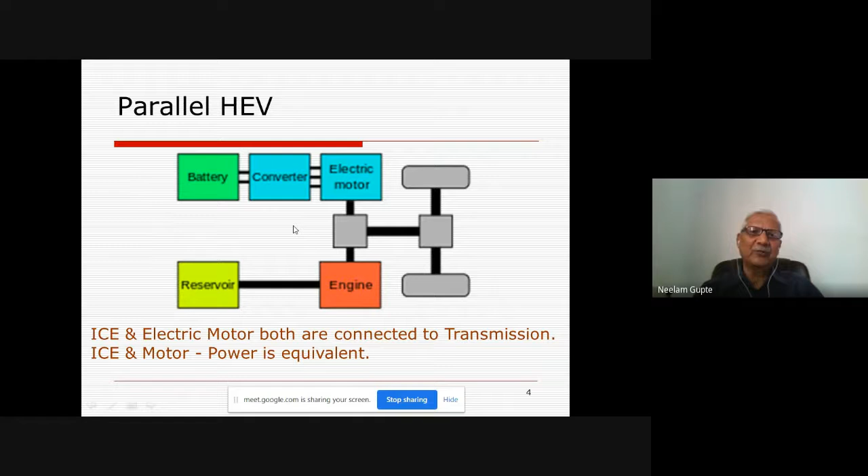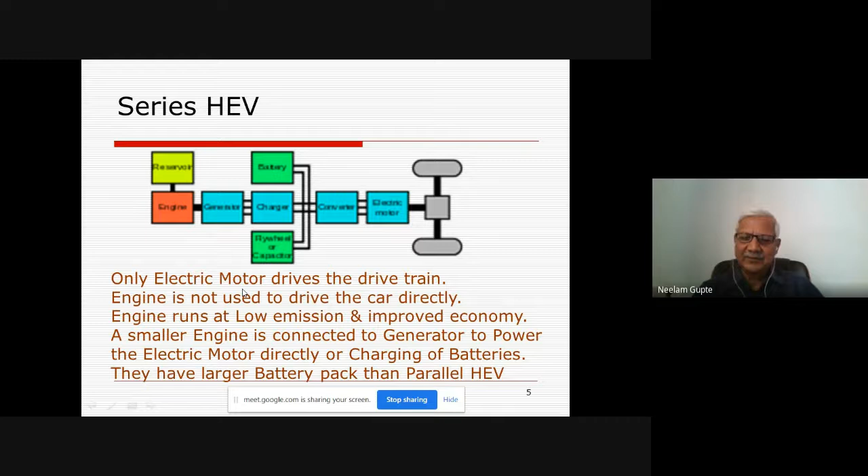Next is the series hybrid electric vehicle. Here only the electric motor drives the drivetrain; the engine is not used to drive the car directly. The engine runs at low emission and improved economy. Generally, a smaller engine is connected to a generator to power the electric motor directly, or to charge the battery, and the battery then drives the motor. Generally, here the battery pack is larger than in the parallel hybrid electric vehicle.

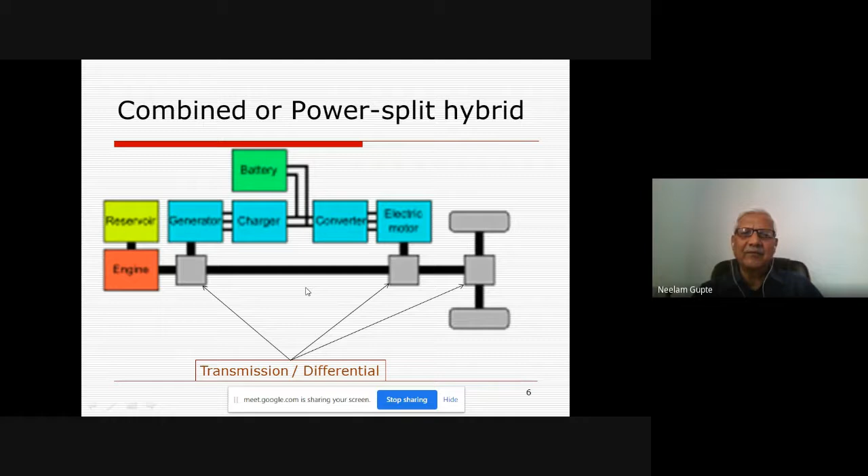Then there is the combined or power split hybrid, where the engine and motor, in various combinations, can drive the vehicle individually, together, or separately, with various parameters acting together.

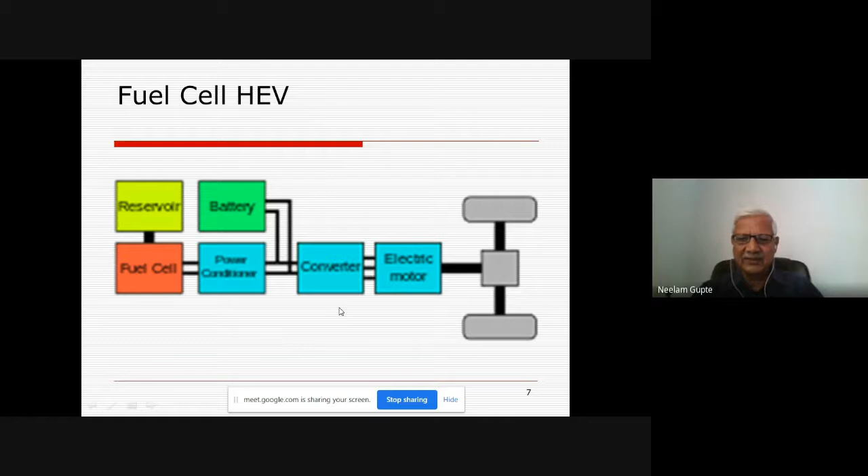Then there is the fuel cell hybrid electric vehicle. The fuel cell generates power, drives the vehicle, and also charges the battery, and the charged battery then drives the vehicle accordingly. This kind of fuel cell hybrid electric vehicle has also started, but is not yet popular enough.

Another category is the plug-in hybrid electric vehicle. When I was working on my project, our donor, Mr. Ashok Patel, asked me that the vehicle would need to go to a gas station for filling diesel, since any hybrid electric vehicle working on diesel-electric or petrol-electric will have to go to the gasoline station. But there may be some operators or users who would just not want to go to the gas station. That's how I came to know about the plug-in hybrid.

I'm talking about way back in 2012. At that time, HEVs were hardly even talked about.

Then there is the HEV with onboard charging. In my project, we later on tried to do that onboard charging, and we partly succeeded, but there is still a lot of work to be done. There can be solar operated, fuel cell operated, or IC engine operated onboard charging possible for all types of hybrid electric vehicles.

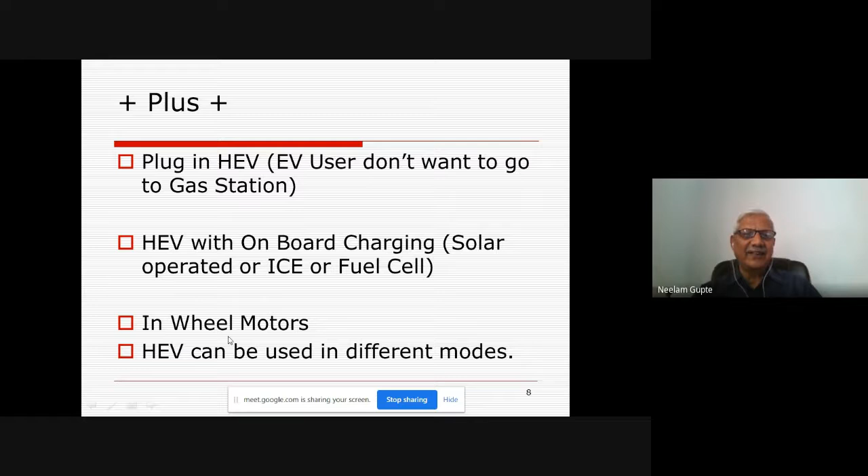And then there is another category of hybrid electric vehicles which use in-wheel motors, also called hub motors. So, as I said, all HEVs can be used in different modes.

Initially, some eyewash was being done by manufacturers with what they called the micro hybrid — I do not know why they called it hybrid — but the system available on those vehicles was start-stop. Whenever the vehicle is halted in traffic or at a signal for a certain amount of time, the engine will be shut off; that is what was called micro hybrid. It will start again once you press the accelerator or clutch.

Another type, they called mild hybrid. It was again with a start-stop system as well as regenerative braking, which they call electric boost.

Next was full hybrid, where the start-stop system was there, regenerative braking was there, and the charge depleting mode was also there — whenever the charge is depleted, the vehicle will turn on conventional fuel. And the last one is plug-in hybrid, which has start-stop, regenerative braking, charge depleting mode, and a rechargeable battery also.

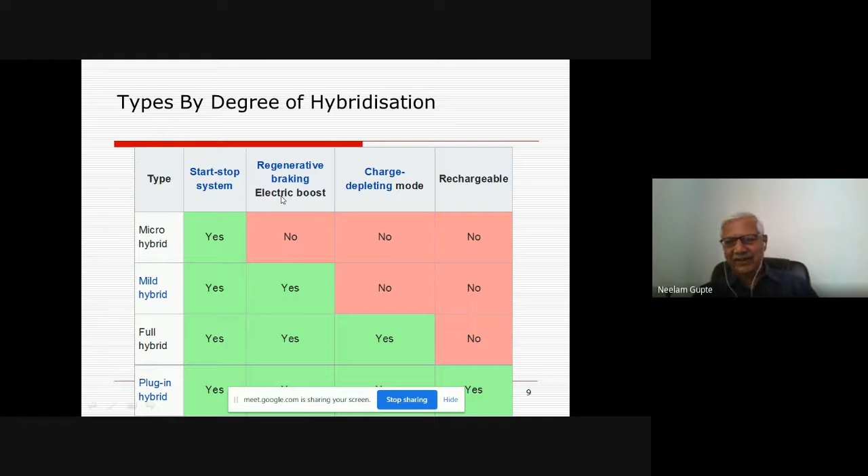So with this, let me begin with my project, which was on reduction in consumption of fuel in an existing diesel car.

The preamble on which I started working was the several causes for growing concerns in those days. This project was started in 2008, and the preamble was depleting fossil fuel. There was much hue and cry about fuel resources going to be exhausted by 2060, and that is how this depleting fossil fuel concern for everyone started.

Another concern was the dependency of the country's economy because of import of crude oil and the global pricing of crude oil. At that time, and even today, OPEC countries control the prices of crude oil, whereby the prices of oil, diesel and petrol keep jumping up and down. This is particularly called national oil security, and that is also one of the concerns.

International concern for the environment had begun in those days due to the impact of global warming and greenhouse gas emissions.

Limited number of cost-effective research was done then in the direction of efficiency enhancement and controlled combustion parameters. Because those days Euro 2, Euro 3 was going on, I expected that something should be done or some research is necessary to convert existing vehicles into hybrid electric vehicles. Alternate energy sources also have dependency either on oil wells or on renewable sources, but the rise in volume year on year of sales adds to the gravity of the problem further.

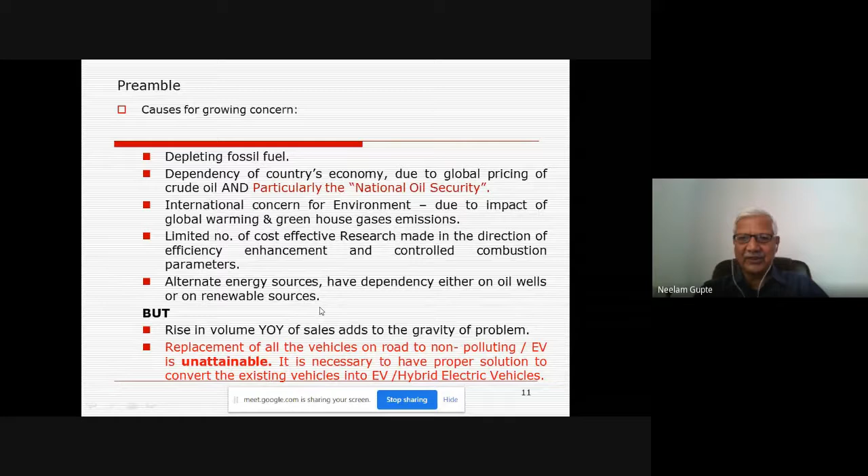The important point is that replacement of all the vehicles on road with non-polluting electric vehicles is just not attainable. Hence it is necessary to have a proper solution to convert existing vehicles into EV or hybrid electric vehicles.

There are advantages and disadvantages associated with EV, HEV, but soon the necessary infrastructure will be developed by the government so that the disadvantages associated with EV, HEV will be nullified. Also, there is a need for development of innovative process and efficient methodology for conversion of millions of cars into hybrid electric vehicles.

There is a problem if all these cars start getting converted, then new vehicle sales will go down. That is why OEMs will not be interested in this. That is what I realized later.

But for reducing consumption of fuel and preservation of fossil fuel reserves for a longer period and better usage of fuel, conversion of millions of vehicles available on road is the key for reducing the import bills.

Chetan Maini in his paper concluded that important societal and economic benefits would result from implementation of EV and HEVs. So the objective of my project was reduction in consumption of fuel in existing diesel cars by retrofitment of two DC hub motors directly onto the rear wheels.

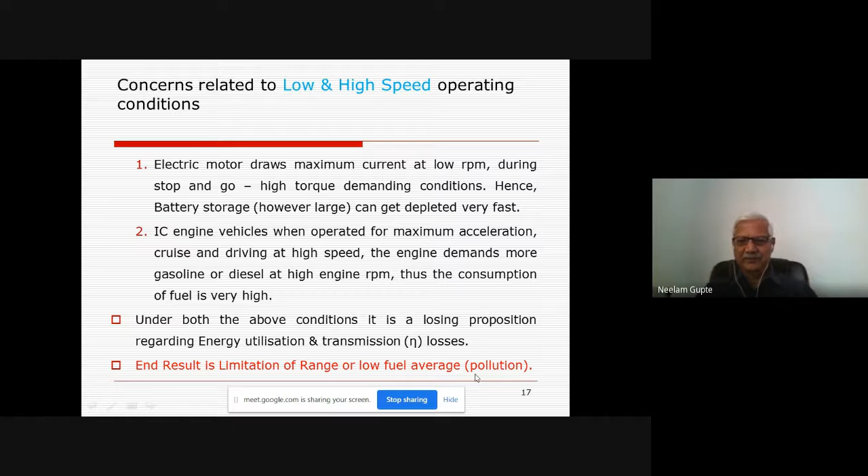So this proposed method actually falls within the purview of draft AIS 123, which at that time was a draft for CMVR type approval of vehicles. In the morning, Dr. Tipse was talking about type approval.

So any new model vehicle or retrofitment requires type approval from ARAI. This draft for electric vehicle conversion was complying because the increase in weight due to conversion was only 50 to 60 kg approximately, within 5% of the curb weight. If you're doing such conversion, most CMVR test rules on a vehicle already approved by ARAI mean the base vehicle approval is automatically implied.

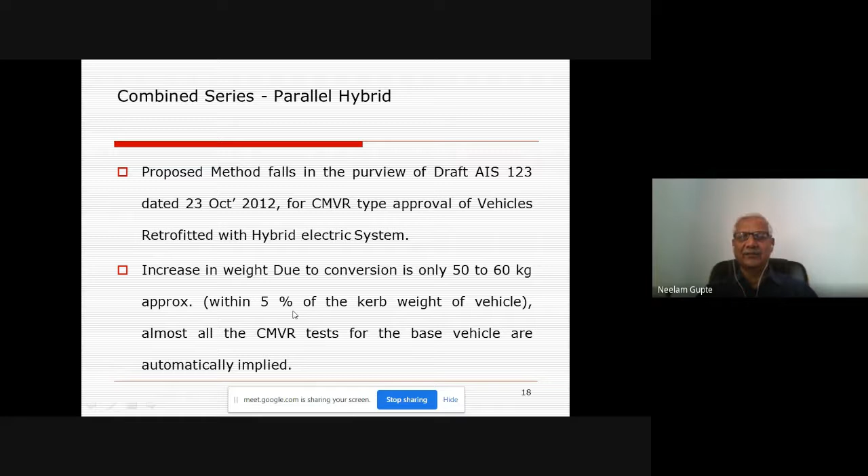So you don't have to comply much with respect to the overall vehicle performance, except for mandatory requirements for aggregates, motor, battery, electrical items, and controllers that need approval. The research work conducted in this study was a combination of parallel hybrid. The engine remains the same; I have not touched anything on the existing driveline, which is front engine, front wheel drive. The specified gradability, acceleration, everything is retained as per normal mode.

During the period when electric motors are driving the vehicle, with the kind of conversion I had done, the IC engine is running at idling RPM, because accessories like the power steering pump, the AC compressor, water pump, radiator fan, and alternator need the IC engine to be running. So even in electric mode, when the vehicle is being driven, the IC engine will have to run at least at idling RPM.

Why am I saying idling RPM? Because at idling it will consume the lowest fuel.

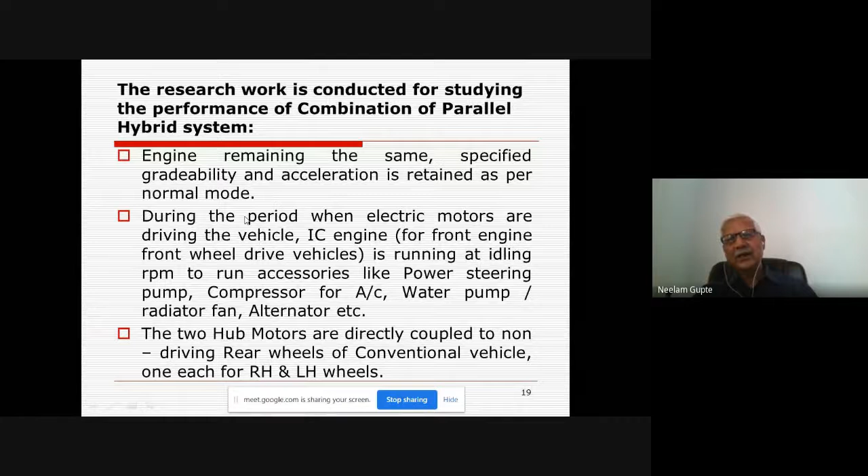The two hub motors are directly coupled to the non-driving rear wheels of the conventional vehicle, one each on the RH and LH wheels. So two hub motors were fitted into the rear hubs, the non-driving wheels.

What was the testing method and routes I had taken up? The vehicle to be converted was tested in as-is condition for different routes, which were also followed for the hybrid electric mode, with the same load, tire inflation pressure, and the same driver. So GVW remained the same, tire inflation pressure remained the same, and the driver also remained the same.

This vehicle was tested under similar conditions after conversion. The same vehicle was tested for electric mode, electric hybrid mode, and then, once duly converted, was also tested for only IC engine mode, because under circumstances when the batteries are depleted and you are running the vehicle under IC engine mode, you should know how much additional fuel that vehicle will consume with the 50-60 kg of additional load. One can calculate or find that out, but still I had done that as well.

The routes I had taken were Vidyanagar to Tarapur State Highway and Vidyanagar to Dakor State Highway. These two routes are more or less similar. We also took another route on an expressway, and did some city traffic condition driving as well.

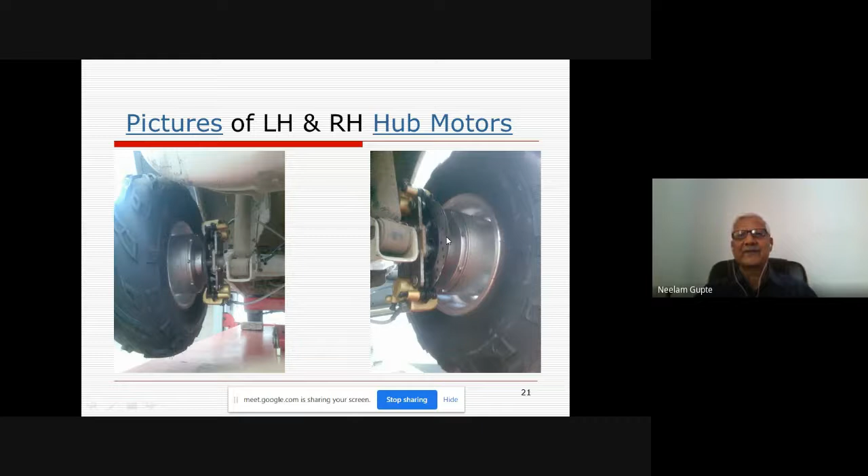If you see the complete vehicle, left and right, this was the first phase of the vehicle electric conversion development. At that time, the maximum power motor available was only a 2.5 kilowatt motor, and I could locate only one source, wherein given the diameter of the motor, the configuration was such that the wheels protruded outside the vehicle by about 200 millimeters.

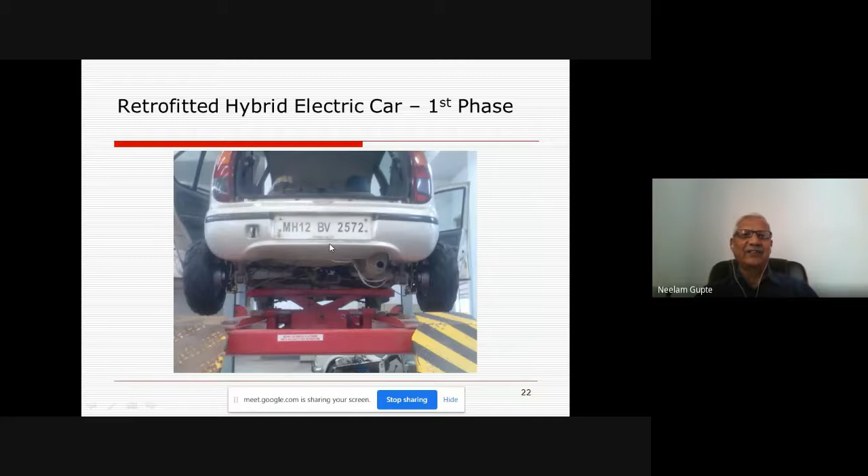But later on, we went back to the same organization and developed a bigger diameter motor, so that the stack height of the motor reduced and we could bring the power into the wheels, which then protruded almost only about 10 millimeters outside as compared to the existing vehicle. But if you see the vehicle, it looks almost like there's no change.

So when we tested the vehicle, there were about 30 readings that I took, for fuel average per trip.

This is another graph where fuel average is plotted with respect to average speed during the trip. If the average speed of the vehicle was lower, between 20 to 40, the fuel average was within the range of 15, 17 to 20, 22. But as the average speed was higher than 40, up to 65, the fuel average went up to 31, 32.

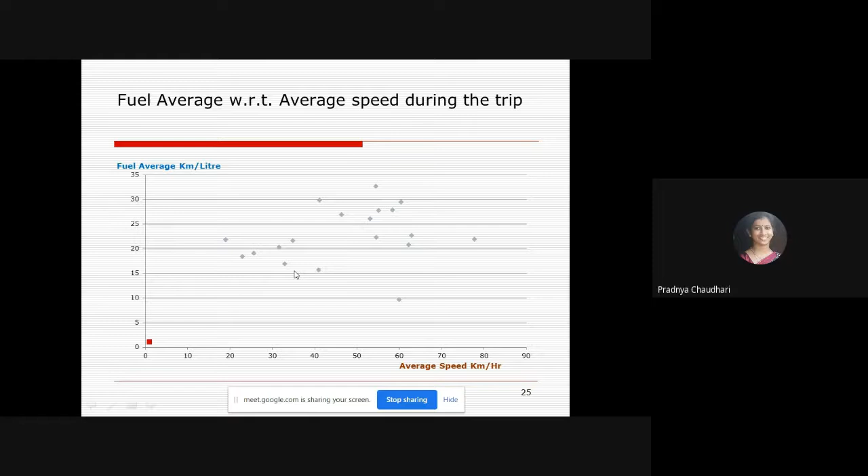I showed you that there were 3-4 routes. One is Vidyanagar Tarapur State Highway. Other was Vidyanagar Dakor State Highway. Then the expressway - the longer route that you will find is that expressway route.

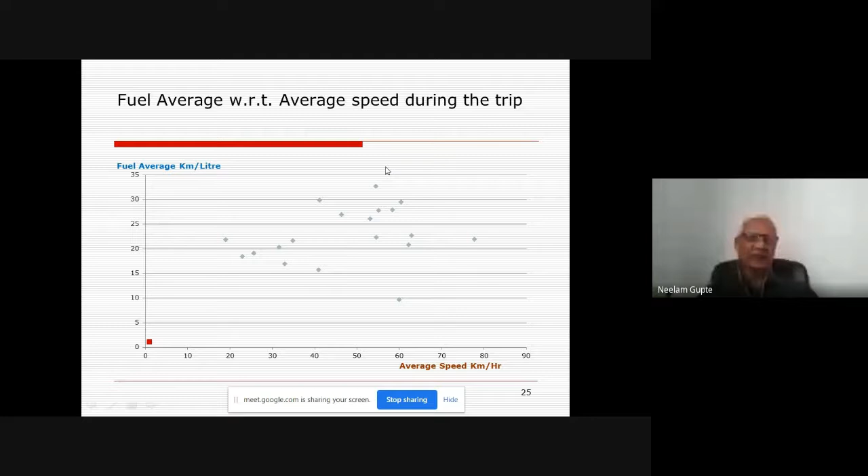So the larger, the more the average speed, obviously the fuel average is better. This fuel consumption is actually only because the engine has to run at idling speed even while your vehicle is running in electric mode, because engine accessories like the compressor, power steering pump, as well as alternator have to run, or a motor, water pump has to run on that IC engine.

Before that, one test that we also conducted was about the battery. Since I had that 160 mm dia motor in the first phase, and the second phase motor that we developed was 220 millimeter dia, so when we fitted that first phase motor, we found that it was going way beyond. We took those motors as well as the suspension out and put them onto a test bed in the laboratory, and that test bed is also available in ADIT even today.

On the test bed that we tested, we got the opportunity to test the battery duration - for how much duration the battery will last, which type of battery will last for how much duration. I had used a 60 ampere hour, then 100 ampere hour, 110 ampere hour battery, all lead acid of course. That is where we got an opportunity to test this motor at 650 to 700 RPM, and we measured the time, the current drawn, and the battery voltage drop till the time the motors would stop running.

This test data - some of it was not recorded properly. We tested it very few times, but we could understand that maximum was up to maybe 30 minutes duration, 30, 35, and once it was 95. So about 30 to 95, it's surprising, but that is what we got. Sometimes it was only 17 minutes, 17.

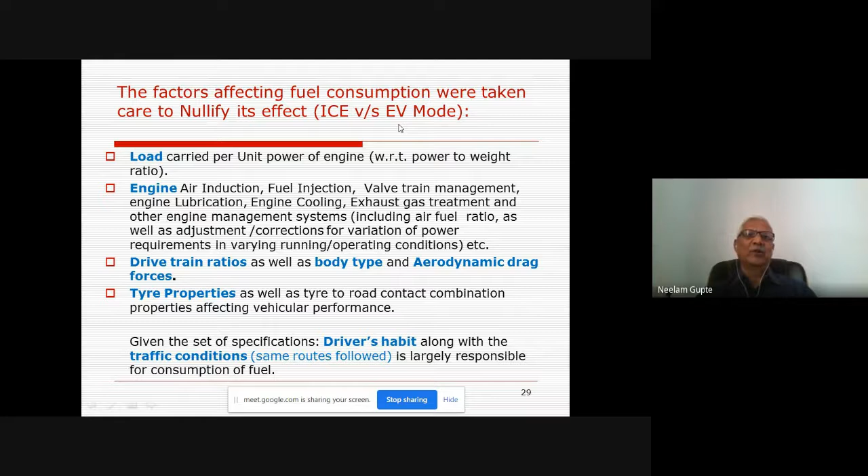Given the set of specifications for the vehicle which was converted into EV, and earlier it was an ICE running vehicle, the major change that would happen is driver's habit along with traffic conditions. But we followed the same routes, more or less the same time duration, so the largely responsible factors for fuel consumption were not affecting the testing that we did for ICE as well as HEV and EV mode, the same vehicle tested in EV mode.

So the conclusion I could draw was that, with the preliminary kind of work that was done, we could achieve almost 40% fuel consumption improvement. And the conclusion was that it is possible to convert a majority of old cars with front engine, front wheel drive, into hybrid electric cars without much difficulty and at reasonable cost.

This method of converting conventional cars into hybrid electric cars is very easy and possible to be implemented in new models as well, which are being introduced in future by the vehicle manufacturers.

The newly developed motors and shaft design provide necessary ease of conversion, because for my project work I had to buy those available motors and modify them to fit our vehicle configuration. In fact, the entire motor was dismantled and so many components were changed and assembled again, which was a major task for us. And then serviceability can also be made possible easily.

Barring the inherent tendency of electrical and electronic components, better service life of the bearings can be ensured, because the major problem would be the inner and outer bearings, which I had changed from what I got from China and modified to use Indian quality bearings with double ball self-aligning bearings, sealed for life, so no greasing is required. That took care of the serviceability part.

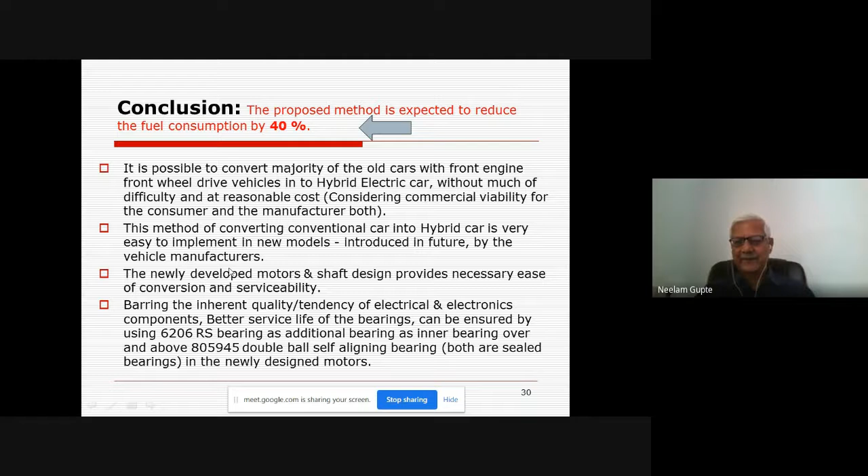So coming to the second point of my presentation.

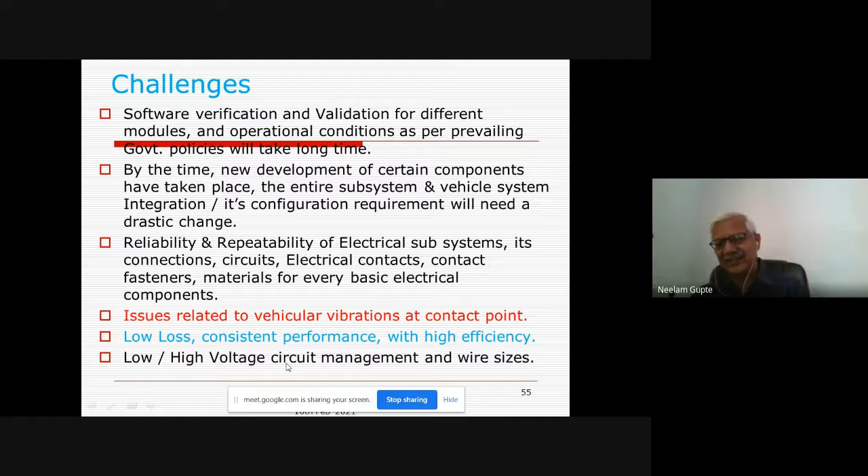What is important is low loss, consistent performance with high efficiency, then low or high voltage circuit management and wires. There are some software companies - when I heard for the first time - who have software for designing wire circuits, wire sizes and circuitry. If 1 meter of wire is saved, it will be huge in quantity if we are talking about maybe 4 crore vehicles.

So for the battery, the challenge is electrolyte material availability, its quality, compatibility, low to high energy density, then variety of chemistry. For example, even lithium ion ore from different sources will have different chemistry and quality, which is going to create trouble for making up the same ampere hour capacity battery. The sizes of the battery are going to be different.

Suppose you are using a 48 volt system with four 12 volt batteries, and tomorrow you want to replace the batteries - the battery available will be of a different size. That is going to be a different challenge faced in future by the customer. All these uncertainties are driving customers away. Charging current is also another dilemma - a time dilemma. How much time is it going to take for charging? Usable life of the battery is again a question mark, validated, but still people will have to be convinced and trust and believe the manufacturers.

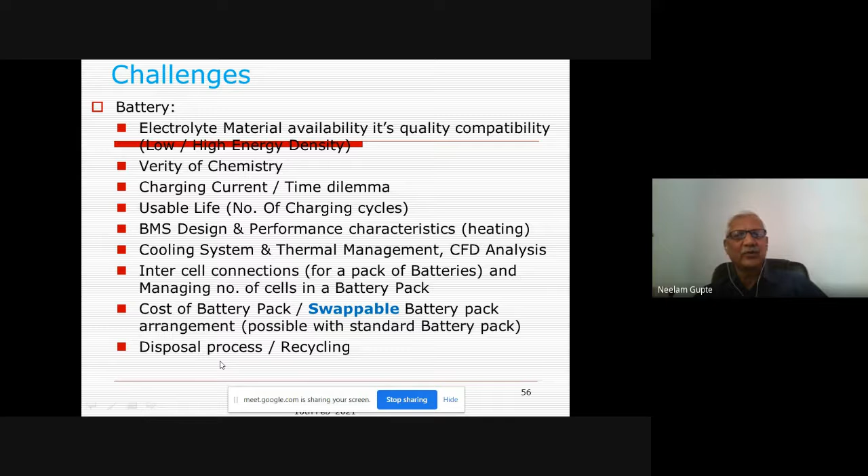But it will be possible only if standard battery packs are available, because from manufacturer to manufacturer, if the batteries are not the same, it cannot be possible to implement swappable batteries. Then ultimately there's the disposal process for the battery, or recycling and disposal of the battery.

Electrical drive - optimum design is important. Variety of optimum design, when I say that, I mean every component that goes into every vehicle, particularly electric or hybrid electric vehicle, has to be the lowest weight as best as possible, because that weight is to be carried by the vehicle battery and its energy content. So optimum design for anything and everything is more relevant in the case of electric vehicles.

So a variety of types of motors, cost of motors, controllers, and different types of motors are being tried out by different manufacturers.

One is output performance parameters that are expected, and there are variations in expectations, and cost of the motor, controller, and BMS. All these items are so costly today. Peak torque and power is also a concern. Low loss, high efficiency under all driving conditions is what is required to be designed.

Magnetic material availability. Different types of magnetic materials are available, and thereby the quality of the motor will depend on that.